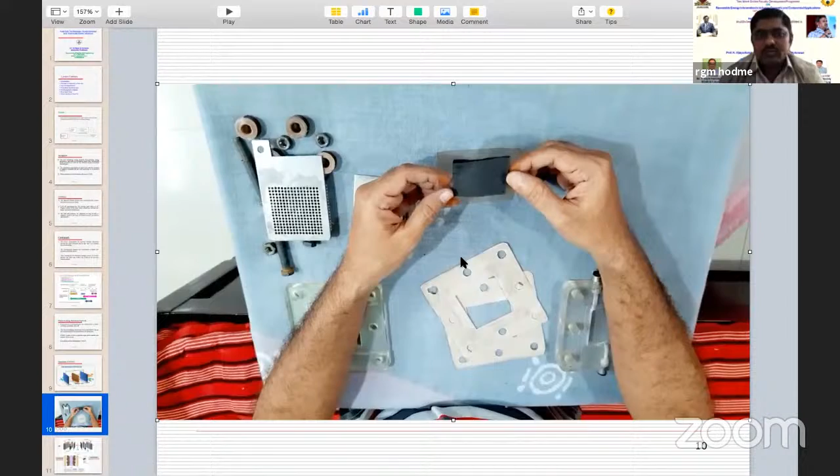In continuation of my explanation about the working principle of proton exchange membrane fuel cell. Is it coming, sir? Yeah, coming, sir. Okay. So

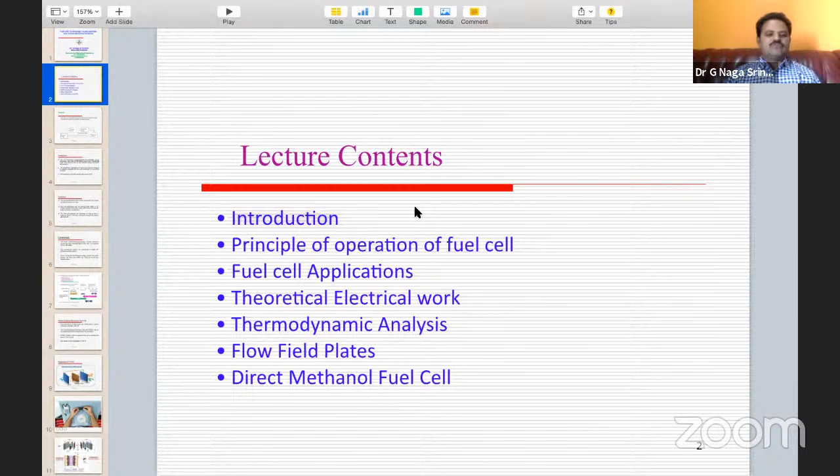Is it visible, all of you? Participants, can one of you please respond? Is my screen or slide visible to you? Participants, please unmute and say. Okay. Yes, sir. Okay.

Fuel cell is an electrochemical device which converts chemical energy of fuel and oxidant directly into electrical energy. In case of conventional system like IC engine, the chemical energy of fuel, means diesel or petrol, first burns in the combustion chamber, that is thermal energy released. That energy is utilized in expanding the piston, then we can get the mechanical energy. If you connect the generator to the diesel engine, then you can get the electrical energy.

But in case of fuel cells, the chemical energy of fuel is directly converted into electrical energy without any combustion and without the help of any mechanical linkages like piston cylinder arrangement. That is why this system attracted the scientists to explore it for practical usage. Means this system directly converts energy, bypassing the combustion as well as mechanical arrangements.

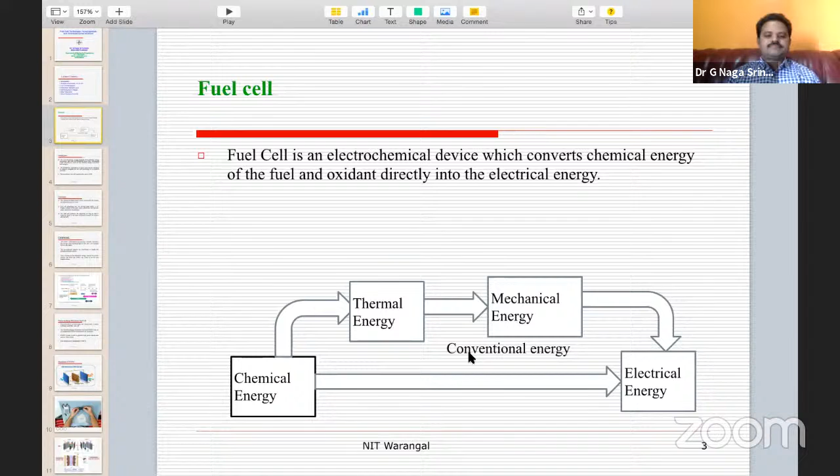Introduction. The ever increasing energy demand, non-polluting energy generation, and other environmental issues have encouraged many researchers to look for new efficient energy conversion technology. The widespread exploitation of fossil fuels and the advances in batteries relegated the fuel cell technology to a scientific curiosity.

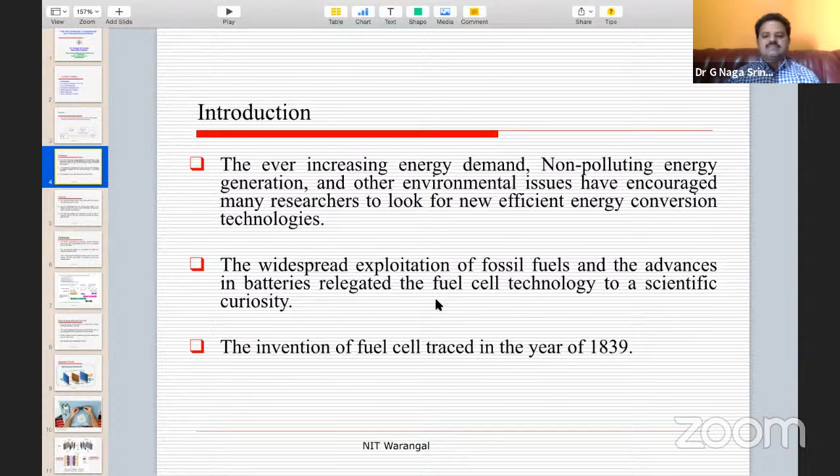What exactly does the point mean? The widespread exploitation of fossil fuels and advances in the battery technology relegated the fuel cell technology to scientific curiosity. So actually, the fuel cell was invented in the year 1839, but people have not focused much. But in recent days, due to these reasons, exploitation of fossil fuels and advances in the battery technology, again people have shown much interest in the fuel cell technology.

The scientist William Robert Grove discovered the reverse electrolysis process of water. Means water, we all know the chemical formula H2O. Means hydrogen and oxygen combined. If you want to split the water into hydrogen and oxygen, we need electrical energy. If you supply electrical energy into the water, water splits into hydrogen and oxygen. So whatever energy is required to split the water, if you combine hydrogen and oxygen, a proportionate amount of energy is released. Based on that concept, William Robert Grove discovered the reverse electrolysis process.

In this system, there are no moving parts, unlike an IC engine. Exhaust is only pure water, means when hydrogen gas and oxygen gas combine, before they combine into H2O, it releases electrical energy. That is why the exhaust from this system is pure water, which does not harm the planet. And also, no moving parts in the system means minimum maintenance.

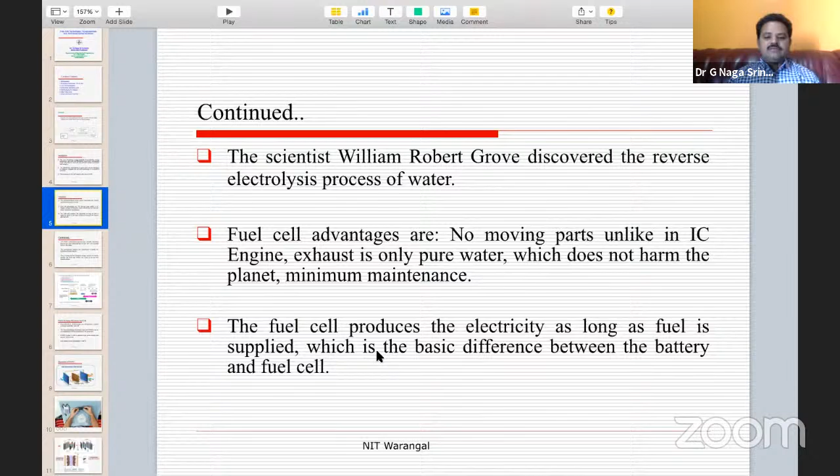There is a confusion between the words fuel cell and battery. A battery is not a continuous process; you can call it a discontinuity. First you have to charge the battery. The battery stores the energy. Then when you take power from the battery, it continues to discharge. So that is a somewhat intermittent process. But a fuel cell is not like that. As long as you supply fuel, it continues to generate electrical energy. So the fuel cell produces electricity as long as fuel is supplied, which is the basic difference between the battery and fuel cell.

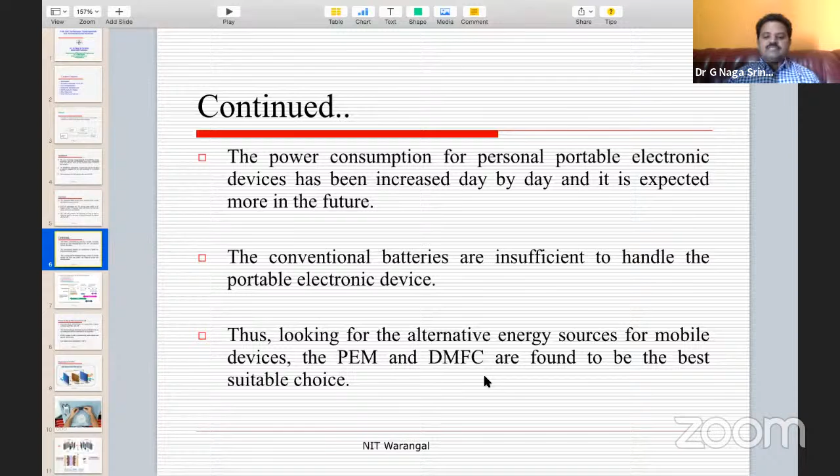So why are we going for this system? Power consumption of personal portable electronic devices like internet routers, cell phones, laptops has been increasing day by day, and it is expected to grow more in future. The conventional batteries are insufficient to handle portable electronic devices. Thus, looking for an alternate energy source for mobile devices, the proton exchange membrane and direct methanol fuel cells are found to be the best suitable choice.

A typical application is portable electronic devices. Let us say its capacity is 1 watt to 100 watts. For this power range, the direct methanol fuel cell will give a better solution. It is the suitable type of fuel cell when the application is in the range of 1 watt to 100 watts. And if the application is in the range of 1 watt to 10 kilowatts, the proton exchange membrane fuel cell is the best suitable system. So I am working on these two cells.

We have the facility in our institute. Almost four scholars already submitted; two got their PhD, then two more submitted. Six more students are working on direct methanol fuel cell as well as proton exchange membrane fuel cell. In our institute, we have this technology, and another faculty member in our department is working on alkaline fuel cells.

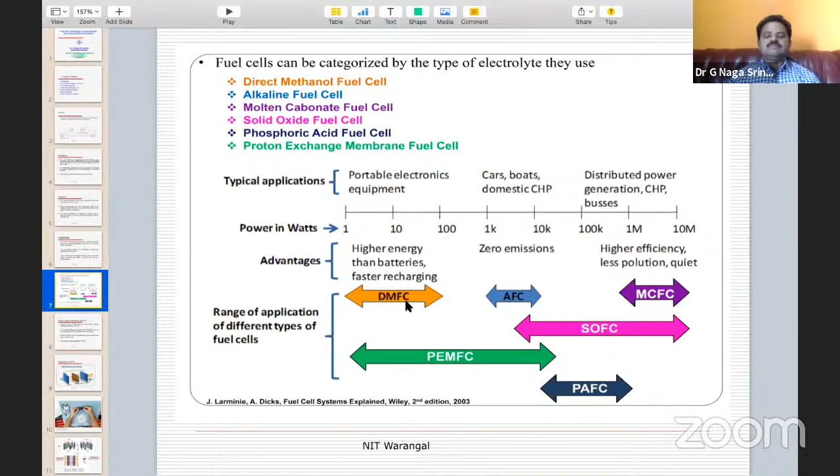Now we'll discuss the proton exchange membrane fuel cell first. What is the working principle? How does it operate? Then what are the applications?

Proton exchange membrane fuel cell has an ion conducting polymer membrane as an electrolyte. In case of batteries, H2SO4 is the electrolyte used. But in case of fuel cells, it is the proton conducting polymer membrane, a plastic paper, just like plastic paper, but its properties are different. What I mean to say is in batteries H2SO4 is in liquid form; here in fuel cells, the membrane is in solid form.

The proton exchange membrane fuel cell system is able to generate high power density and permits faster startup, and can operate at low temperatures, meaning even at ambient conditions it can work.

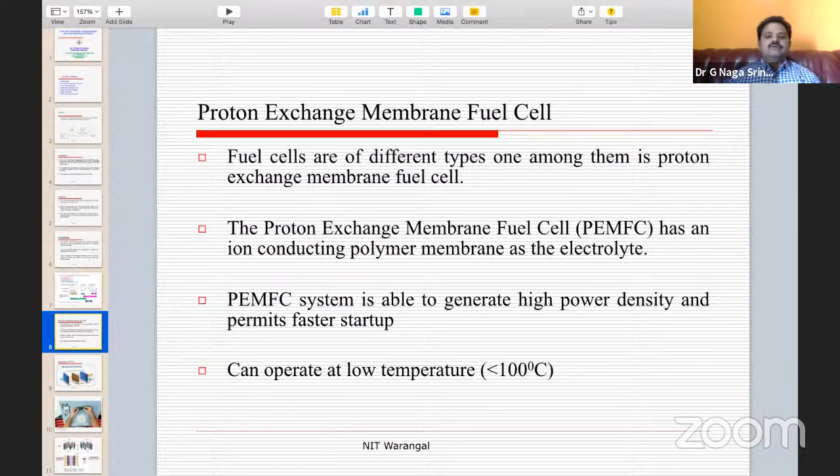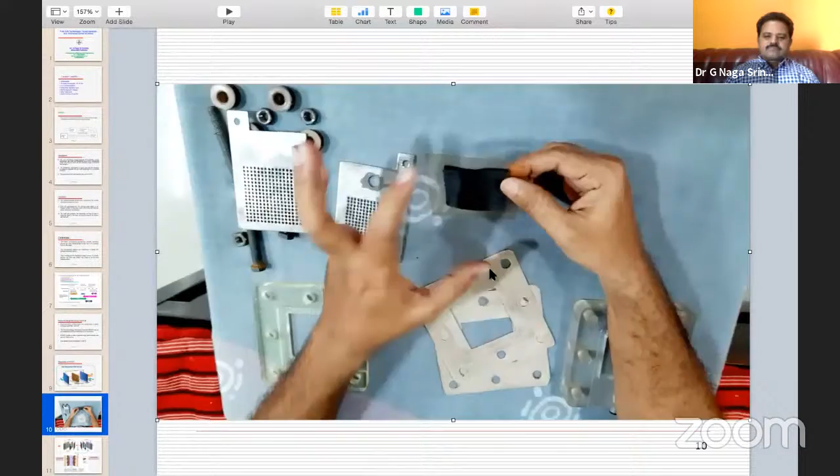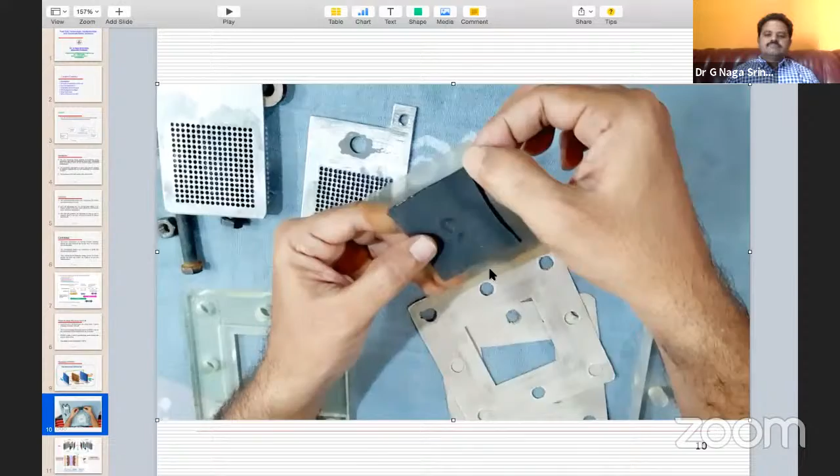In continuation of my explanation about the working principle of proton exchange membrane fuel cell, here I am going to explain the practically used fuel cell. This is called membrane electrode assembly. In this, the polymer paper is called membrane. It is mainly made up of Nafion material.

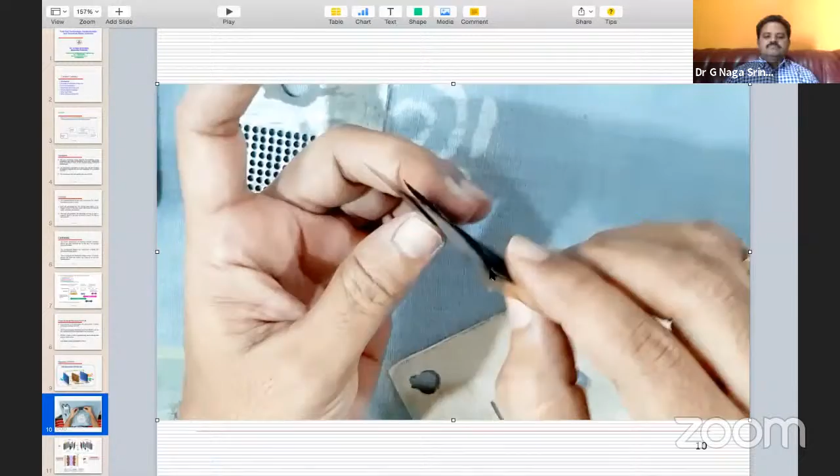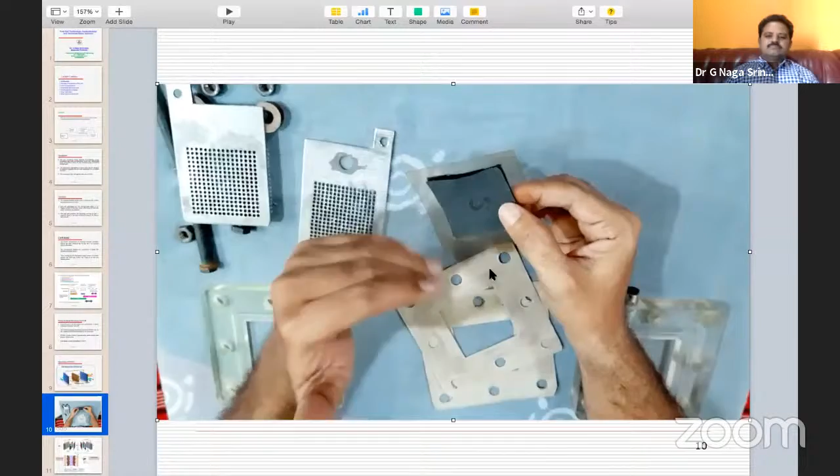On both sides of this membrane, the catalyst material is coated. Next to this catalyst layer, a gas diffusion layer is placed. Similarly, on this side also there is catalyst material and gas diffusion layer. The complete thing is called membrane electrode assembly. Now come to the operation of this fuel cell. On one side of this MEA, popularly called membrane electrode assembly.

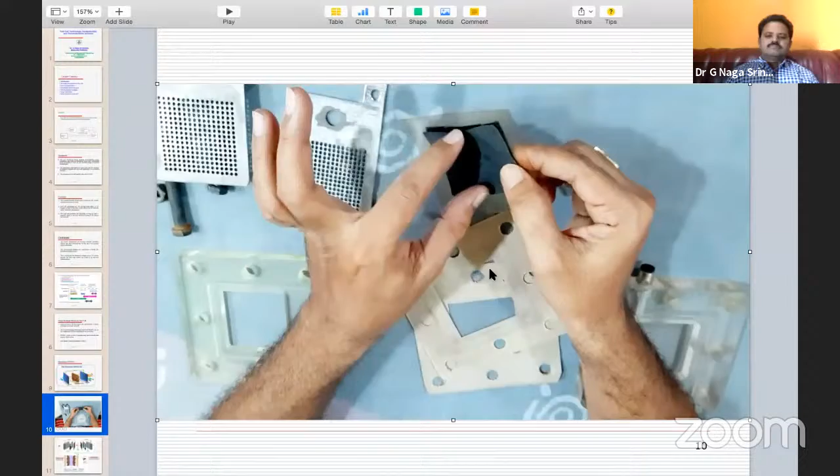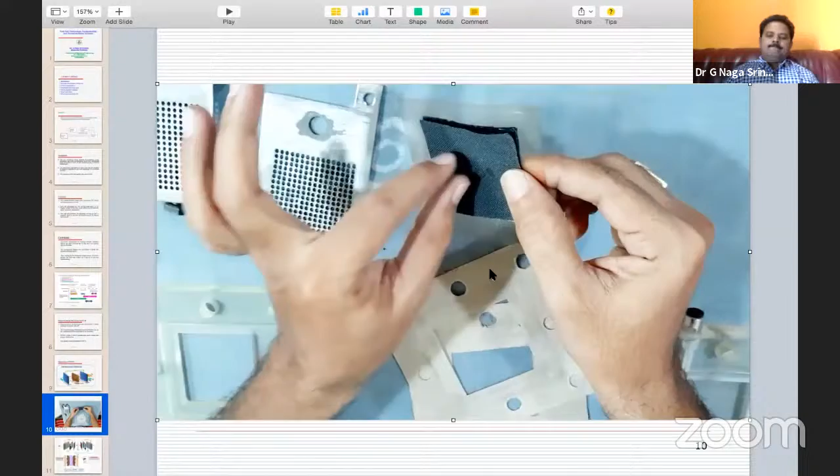When you supply the hydrogen gas, this gas is diffused through this diffusion material, mainly made up of carbon cloth. The catalyst material is made up of a platinum carbon mixture. When you supply hydrogen gas, it diffuses through this gas diffusion layer and reaches the catalyst material, where it splits into protons and electrons.

Then protons are conducting through this membrane, and protons means ions. H plus ions are coming this side. This membrane is offering resistance to the electrons, so electrons are available here. Now, on the other side of this fuel cell, the H plus ions reach here.

When you supply the oxygen gas, oxygen reacts with the H plus ions, and to complete that reaction, it needs electrons. So on this side electrons are available, and on this side electrons are required.

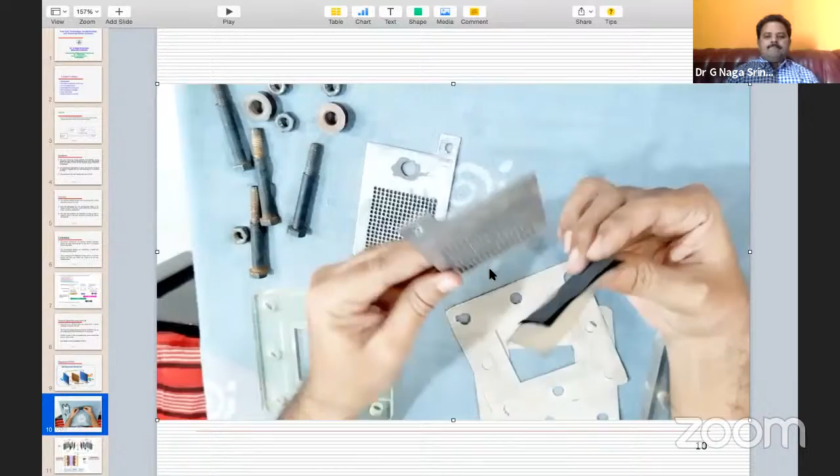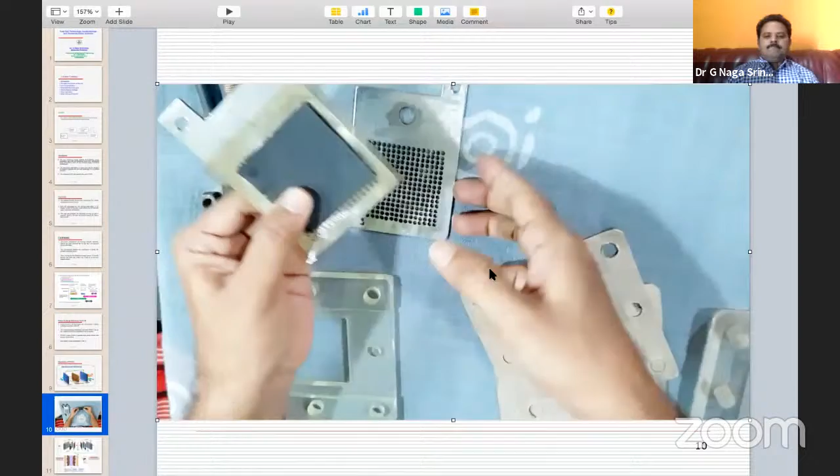So when you connect the electric field with the help of current collectors - this is called a current collector - I'm keeping one current collector on one side. Whatever electrons are generated conduct through this current collector, and to supply the other side, one more current collector is placed like this. Through the electric wire, when you connect these two, the electric field is connecting.

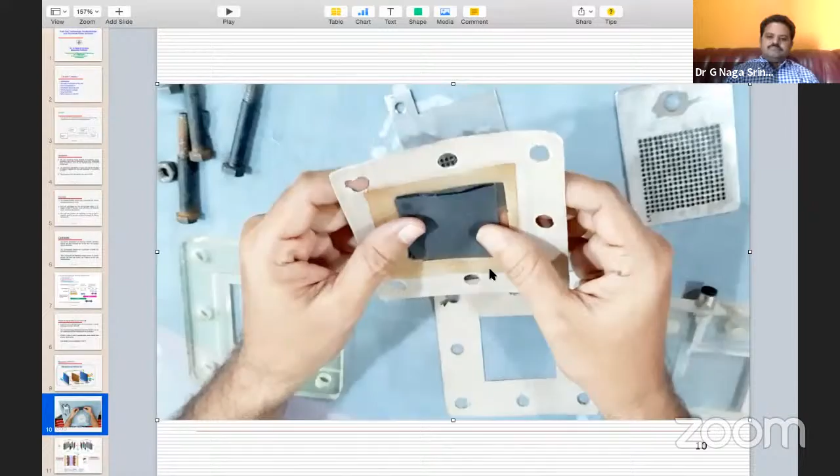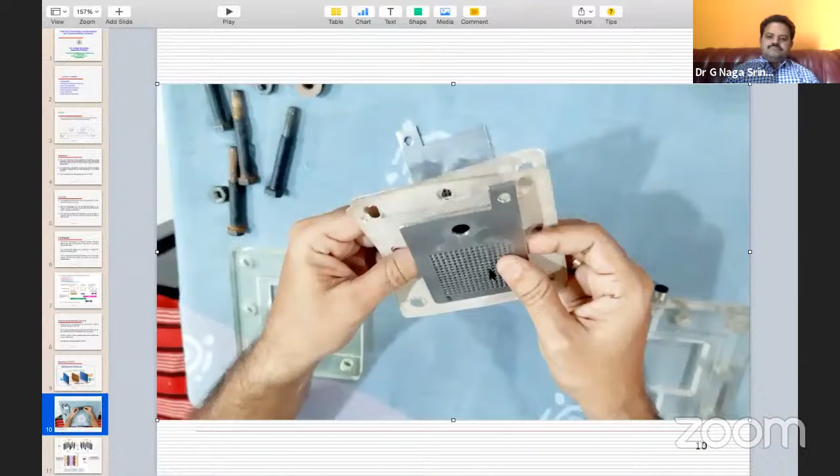Now, to avoid short circuiting of the current collectors, in between the plates a gasket layer is placed on both sides of this membrane electrode assembly. After placing the gasket layer, we keep the current collectors on both sides. Now we can avoid short circuiting of these current collectors.

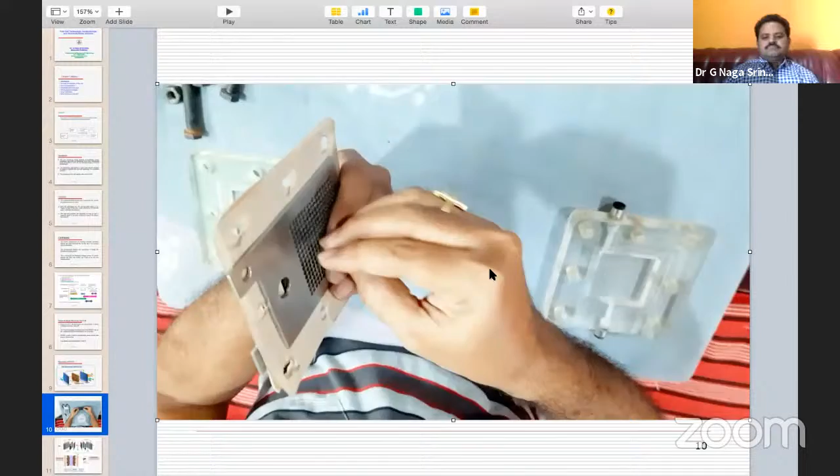Now with the help of an electric wire through some external load - let's say a bulb or motor - you connect these two through this external load. So the electric field is generated because here electrons are generating, then electrons are reacting here to produce the electric field. This is called a complete fuel cell.

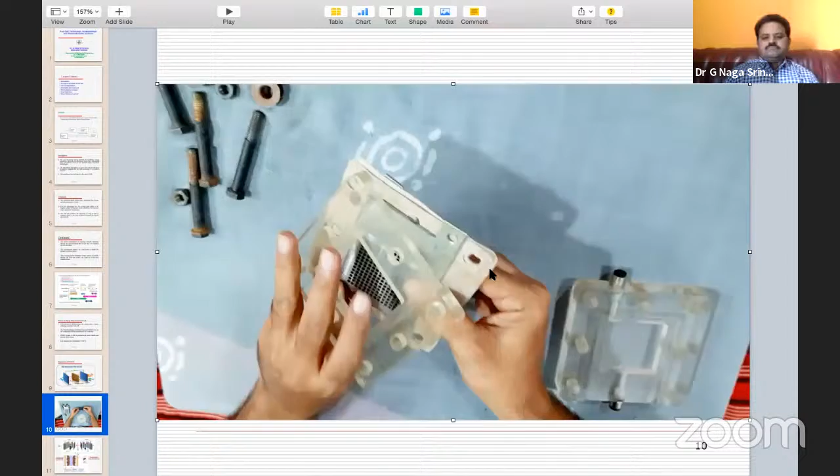So to assemble this, we need end plates to hold the complete assembly. This is one side end plate, this is another side end plate. These end plates are firmly held with the help of nut and bolt. Now this is called the complete fuel cell assembly.

I'll repeat the operation. When you supply the hydrogen gas here, as soon as you supply hydrogen, protons and electrons are generated at the catalyst area. Electrons are available for the electric field, and they are connected with the help of current collectors. The electric field - electrons are connecting this side, the anode side. This is called the anode side, and this is called the cathode side. So here you see, interestingly, the fuel cell operation.

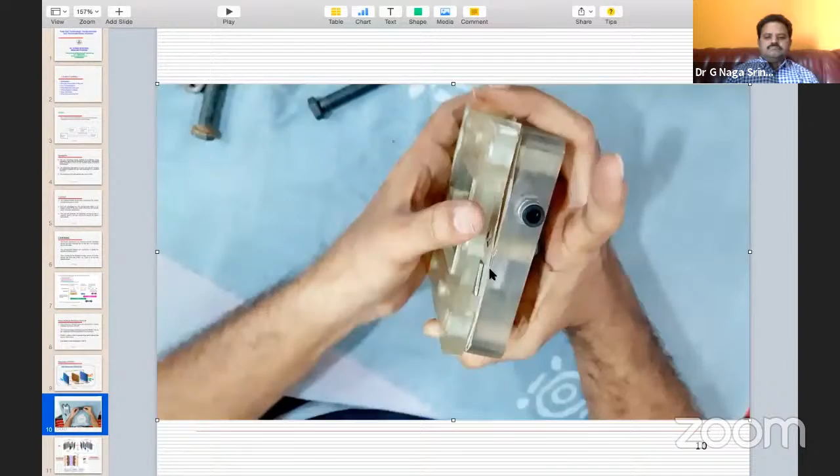Just by supplying the hydrogen gas and supplying the oxygen here, current is generating continuously. As long as you supply the fuel, it generates current.

The interesting point you have to observe in this fuel cell operation is it doesn't have moving parts, so less maintenance. Then long life, because wear and tear is not there. Then the emission from this cell is H2O.

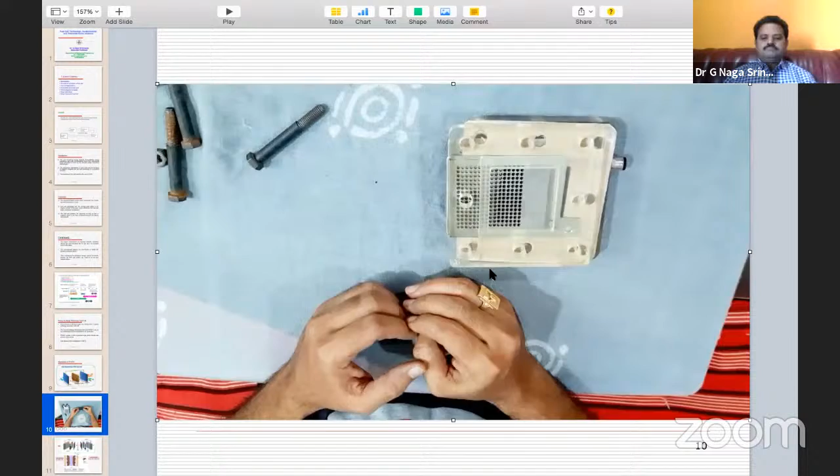This is environmentally friendly - water vapor or water. And it is similar to the IC engine.

As long as you supply the fuel, it continuously generates electric current. This is the upcoming technology that people are looking into.

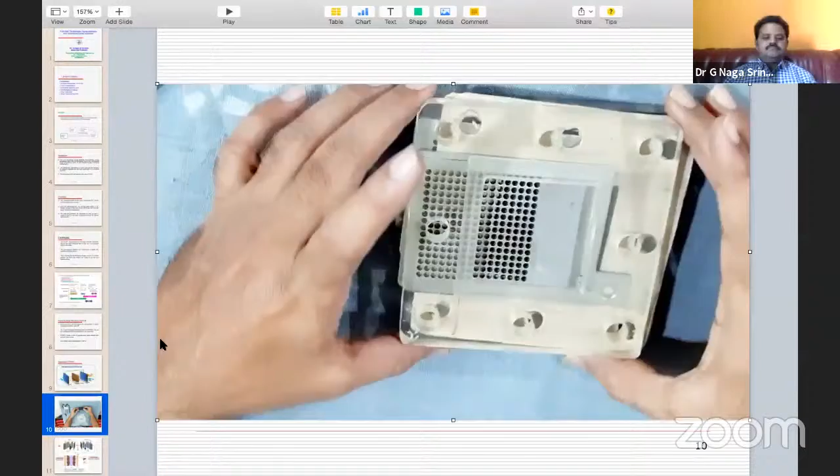So this is the operation of a fuel cell as practically used. Thank you.

Now, with that, I hope to some extent you understood the operation of the fuel cell. Now, more details about the fuel cell. In the previous system, previous slide, you have seen there are three components.

There is a catalyst layer applied on both sides of the membrane. This is PEM, meaning proton exchange membrane. Then followed by the gas diffusion layer - you might have seen this in the video - there is a carbon cloth.

In that, one problem is there. When you supply hydrogen gas, there is no guarantee that the gas may occupy throughout this space. If that space is not occupied by the gas, what happens? The chemical area available may not be utilized properly.

That is why, to overcome this problem, there is a flow field plate - FP means flow field plate. This flow field plate has internally cut side grooves on the inner side. Now, when you supply hydrogen gas, that gas flows following the groove - it passes through this groove of the plate throughout this space and comes out on this side - so that the gas may be available throughout this volume or space.

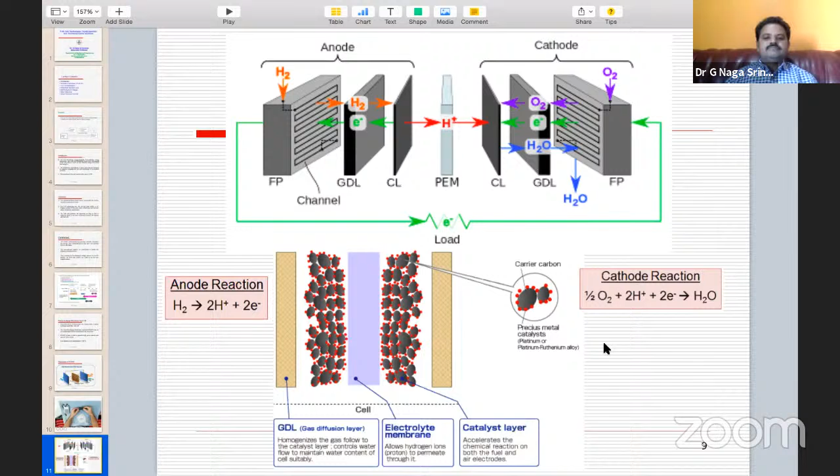So now I hope you understood the operation of the fuel cell. Any doubt on this topic? If you need any clarification, I can clarify. Otherwise, I'll go ahead.

With that, now let's see the application of fuel cell. Fuel cell can be used in cars in place of an IC engine. In the previous slide, I showed single cell operation. A single cell may hardly generate 0.5 to 0.8 volts.

So the Toyota company prepared the fuel cell stack, and this may generate power equivalent to the engine used in these vehicles. That power, whatever power the engine develops, let us say 30 horsepower, 40 horsepower engine, like that—it is similar to that.

The fuel cell stack is designed such that number of cells are connected in series, and that system is called a fuel cell stack. That stack can be placed by removing the engine from the vehicle, and this stack generates current almost equal to that engine, and the traction motor or electric motor may be used here before the gearbox.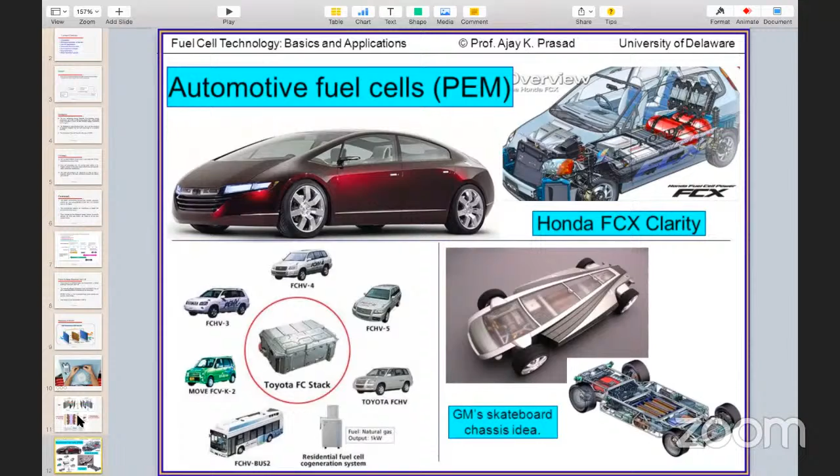Now coming to the analysis point, why the fuel cell has not become popular so far: one is storage and handling capacity of hydrogen. Another thing with respect to the system, two key issues limiting the widespread commercialization of fuel cell are lower performance and high cost.

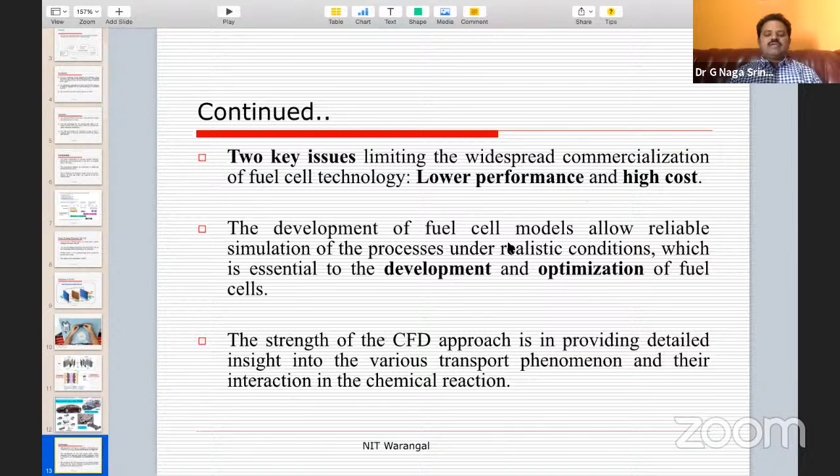So the performance can be increased once you understand the thermodynamics of the fuel cell. Now first I will discuss the theoretical electrical work, then the thermodynamic analysis point I will discuss.

Theoretical electrical work: how to determine how much electricity the fuel cell can generate. Because there is no combustion in the fuel cell, the relevance of hydrogen's higher and lower heating value is used as a measure of energy input in a fuel cell. This is the maximum amount of energy that may be extracted from the hydrogen.

However, while electricity is generated in the fuel cell, in every chemical reaction, the amount of entropy is produced. Because of that, hydrogen cannot be fully converted into useful work.

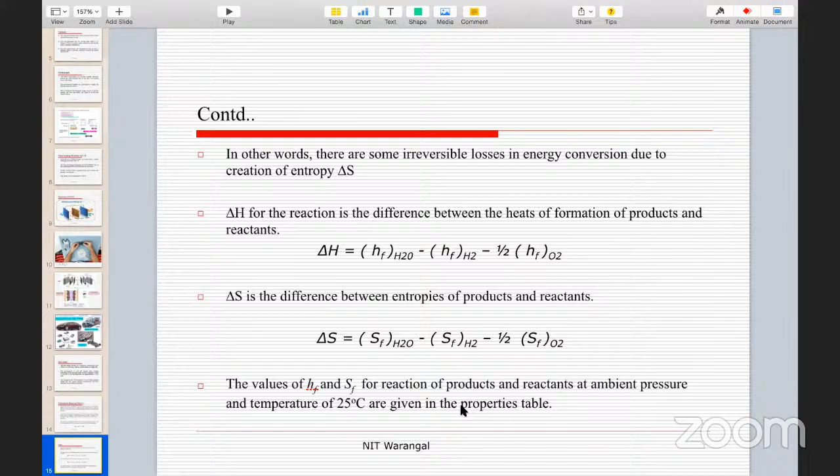So in general, electrical work is the product of charge and potential: Electrical work is equal to charge into potential. Q is the charge in coulombs per mole, E is the potential in volts. This is the total charge transferred in a fuel cell reaction per mole of H2 consumed.

For 1 mole of H2 consumed, how much charge is transferred is given as N into Avogadro's number, where N is the number of electrons per molecule of hydrogen gas, and this is the number of molecules present in a mole, multiplied by the charge of 1 electron. So this equation gives the charge transferred.

So how many electrons are present in a molecule of hydrogen? How many molecules are present in 1 mole? Because we are calculating per mole of H2. Then the charge of 1 electron. So the product of the number of molecules per mole, that is Avogadro's number, and the charge of 1 electron, we can call this the Faraday's constant.

Product of Avogadro's number and charge of 1 electron is known as Faraday's constant, and its value is given as 96,485 coulombs per mole. So therefore, electrical work is related as N into F into E.

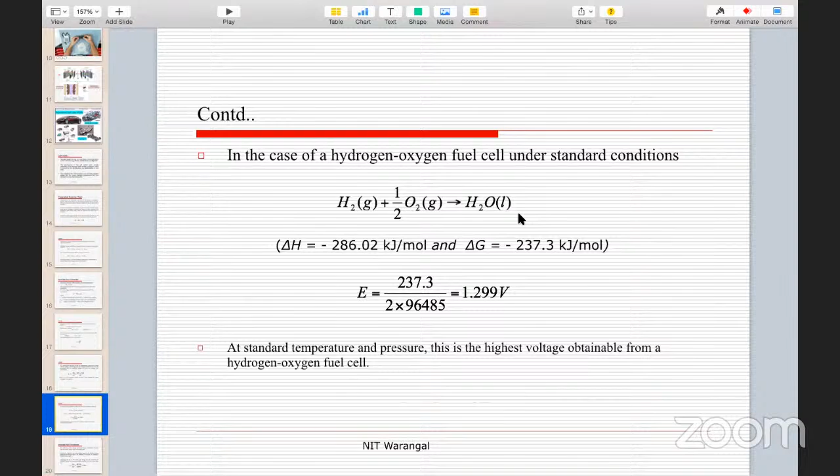Cell voltage is one performance parameter in the fuel cell. Another one is cell efficiency. The efficiency of any energy conversion device is defined as the ratio between useful energy output and energy input. In case of fuel cells, the useful energy output is the electrical energy produced, and energy input is the enthalpy of hydrogen, because the fuel you are supplying is hydrogen. So the hydrogen higher heating value is the energy input, and whatever electrical output you get from the cell is the cell output.

Therefore, the maximum possible efficiency of the fuel cell is given as delta G by delta H. So 237.34 by 286.02, you will get 83%. So the maximum cell efficiency that can be attained in the fuel cell is 83%.

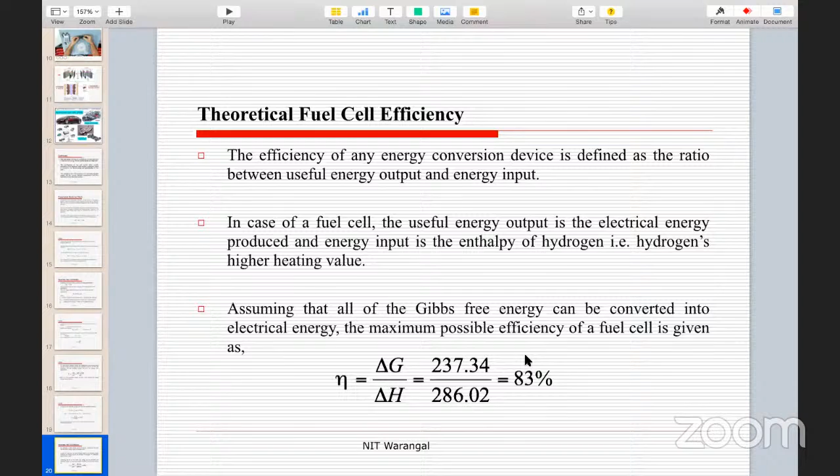Now, why are you going for thermodynamic analysis? I already mentioned thermodynamic analysis studies the losses incurred in the operation of the fuel cell when you draw current from the cell. In the application of fuel cells, to generate electricity from hydrogen, the performance of the cell must be high. However, some problems such as decrease in performance stemming from thermodynamic irreversibilities in the fuel cell arise during operation.

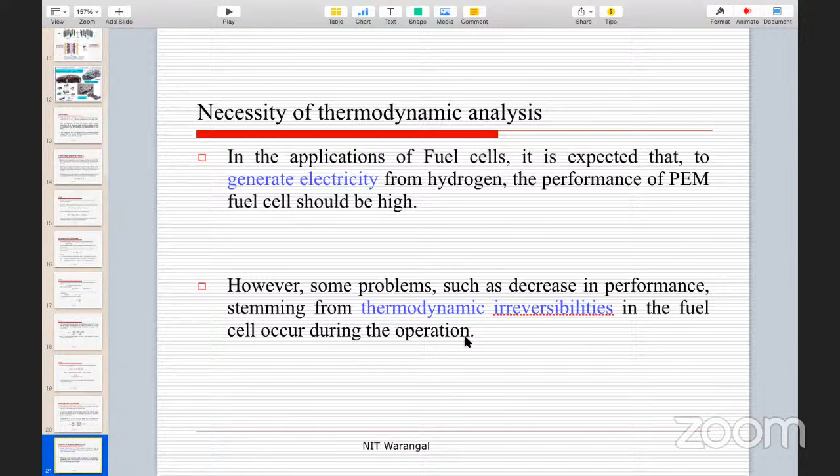The thermodynamic analysis, in other words, you can call it an electrochemical model. Here, those points I'm going to discuss. Useful work is obtained from the fuel cell only when current is drawn. When you draw current, it starts its operation in the form of chemical reaction.

The actual cell voltage, the reversible cell voltage, decreases from its equilibrium thermodynamic potential because of irreversible losses. When you look into the chemical reaction of the fuel cell, H2 plus O2, you get electricity plus H2O plus heat. The actual cell voltage is given as reversible cell voltage minus losses.

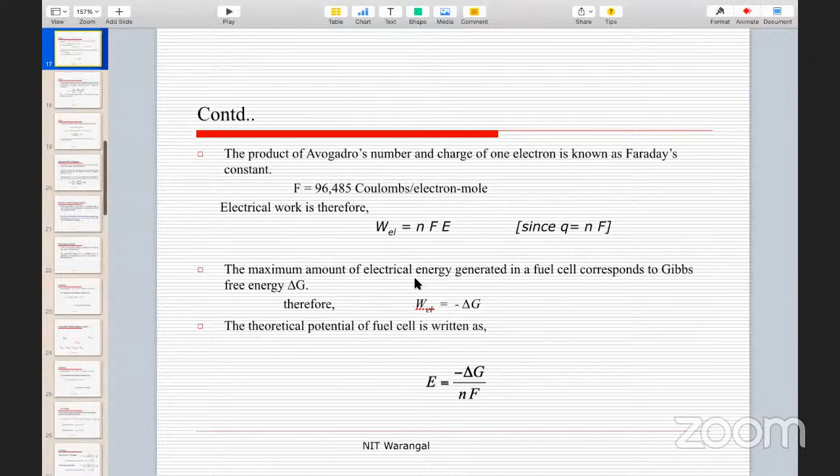So up to this portion, the reactions may happen. After that, it stops. So to continue the operation of the fuel cell, we must connect anode and cathode with the help of a current conductor. So when you draw current from this cell, theoretically the cell is generating 1.299 volts,

but when you draw current with the help of external circuits, other resistances are involved. Whatever electric wire you are using offers some resistance to the electron flow, and whatever membrane you are using offers some resistance to the conduction of protons. This is one loss. And also at the chemical reaction, as soon as you supply gas, there is no guarantee that it immediately participates in the reaction. It may take some time to react.

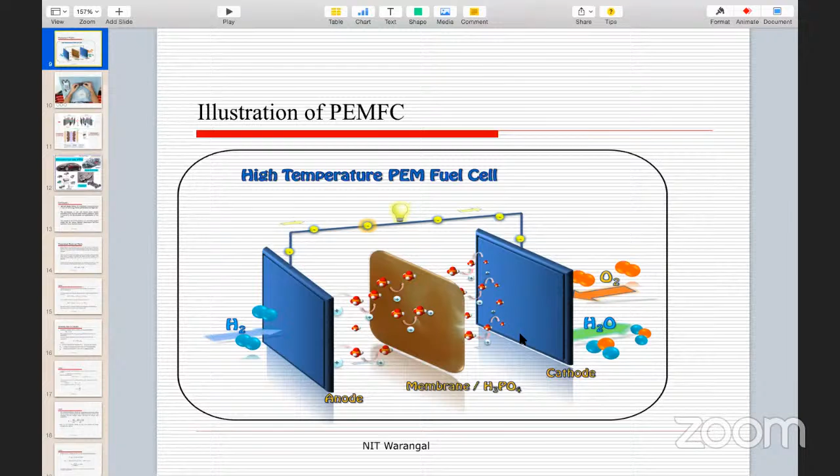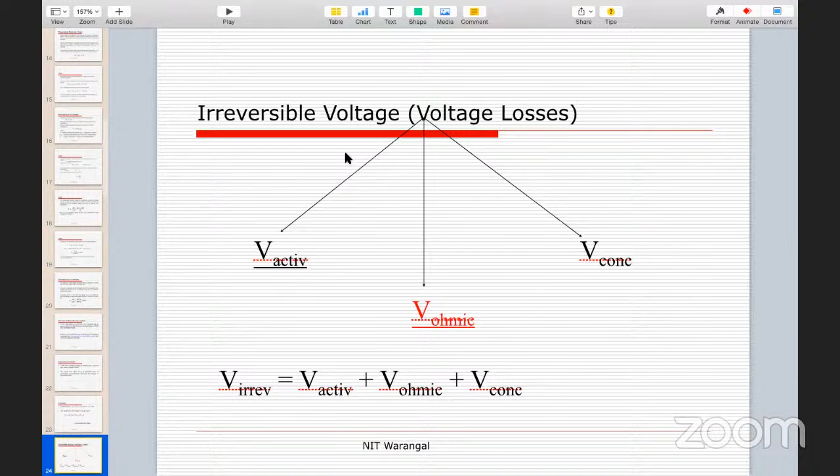So the topic which deals with the study of voltage losses is called thermodynamic analysis. See, these are the losses: activation loss, ohmic loss, and concentration loss. Sum of these losses you can call irreversible voltage. So in the operation of a fuel cell, these losses must be considered.

Otherwise, in the ideal case, if these are zero, the reversible voltage is equal to the cell voltage. But practically, we cannot avoid these losses. That is why we have to take into account these losses in the operation of the fuel cell. Therefore, cell voltage is equal to reversible cell voltage minus losses.

So now we'll discuss the mathematical model to see the effect of the temperature and pressure of the supplied gas on the performance of fuel cells. So we have a set of equations. Please follow, all of you. This is very interesting, and you can start analyzing the cell performance mathematically, or you can give this topic to your UG students for their final year project. A very interesting study we can get here.

So one by one I am explaining. I'll go back once again. See here, the total number of parameters. Cell voltage is equal to reversible cell voltage minus activation loss, ohmic loss, and concentration loss. From the literature, we have a set of equations available to determine the reversible cell voltage, and similarly the activation overpotential, ohmic loss, and concentration loss.

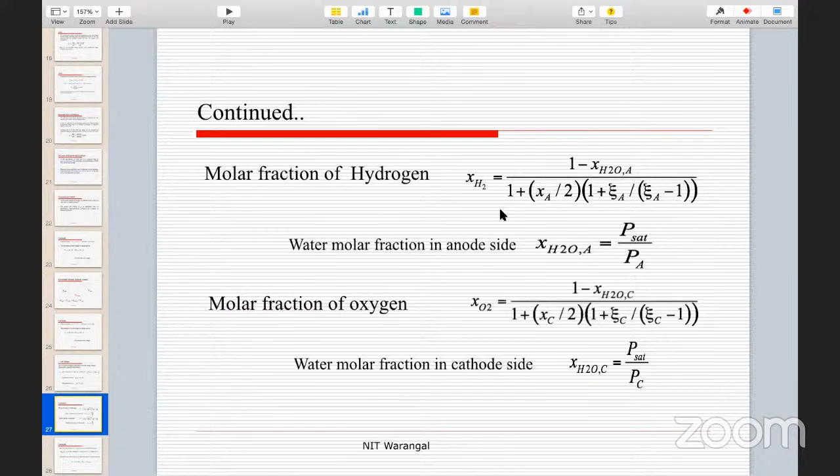Okay, so far whatever the equations I explained, they are useful to determine the reversible cell voltage. Now, actual cell voltage is reversible cell voltage minus the losses. So how to quantify these losses? So we have set of equations available in the literature. Now first I will discuss the activation loss. Activation losses are caused by slowness of reactions taking place on the surface of electrodes.

I already mentioned at the catalyst area, as soon as the hydrogen gas reaches, it starts splitting into protons and electrons. How fast that hydrogen gas is splitting into protons and electrons is studied by this activation process. And if it takes more time, activation losses are more. If it takes less time, activation losses are less. So to overcome that loss, portion of voltage generated is consumed in overcoming the chemical reaction that transfers the electrons to or from the electrode.

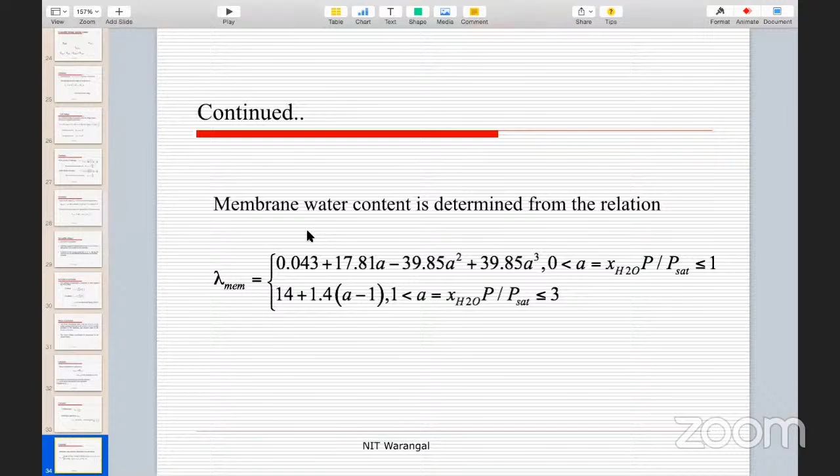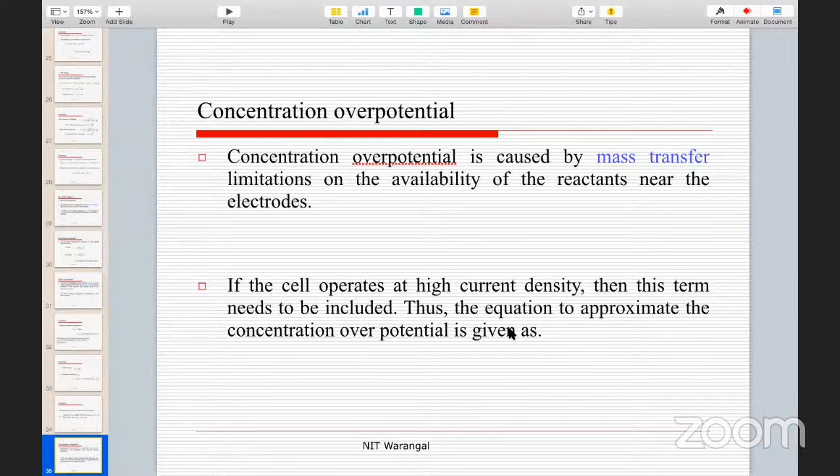Then other loss in the fuel cell is concentration loss, or other way you can call it concentration overpotential. This is mass transfer limitation. I already mentioned, if the cell operates at very high current density, this term needs to be included because water may be getting accumulated at the cathode side, and that may obstruct the catalyst area, due to which oxygen may not reach that area and may not react.

So for that, the empirical relation is given as I into beta 1, I by I maximum whole to the power of beta 2, where beta 1, beta 2, and I maximum are constants that depend on temperature and reactant partial pressures and can be determined empirically. Beta 1 can be related further using these relations. If this value is less than 2 atmosphere, you can use this relation for beta 1. Else, you can use this equation.

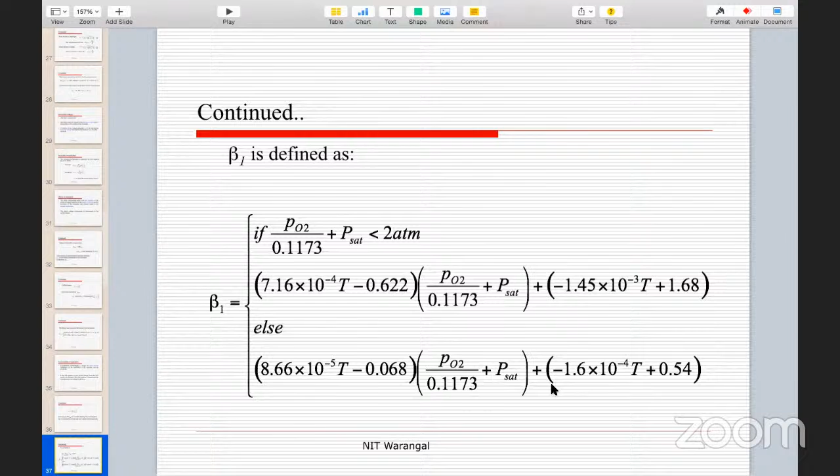So once you have the ohmic, concentration and activation relations, we have the mathematical relation for activation loss, ohmic loss, and concentration loss. You substitute this in this equation, then you will get cell voltage. Cell voltage depends on the current you are drawing. At low current density, cell voltage may be maximum. When you draw more current, faster reactions take place, and the losses also proportionately increase. That is why as more current is drawn, cell voltage decreases.

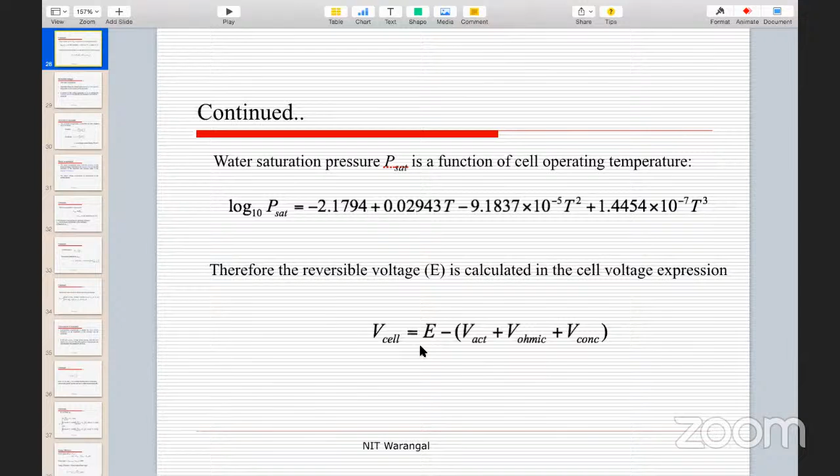So once you have cell voltage and current, the product of cell voltage and current will give power. The power output of the cell is equal to V cell into I, where V cell is E minus V activation, V ohmic, V concentration, into I. And this is the power output. Power input is what you are giving to the cell, the hydrogen gas you are supplying: hydrogen higher heating value times number of moles of hydrogen in minus number of moles of hydrogen out, because some hydrogen may come out without participating in the reaction.

So here, please observe the change. The number of moles of hydrogen reacted, this is unreacted gas, then hydrogen higher heating value. This is the power input. Therefore, fuel cell efficiency is equal to power output by power input. You'll get it.

See, any doubt on this? Yes? All of you, are you following what I'm explaining? Seems to be new area.

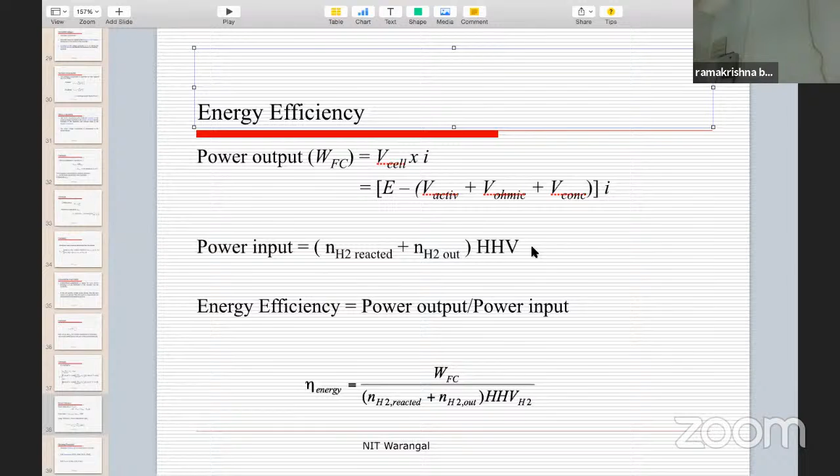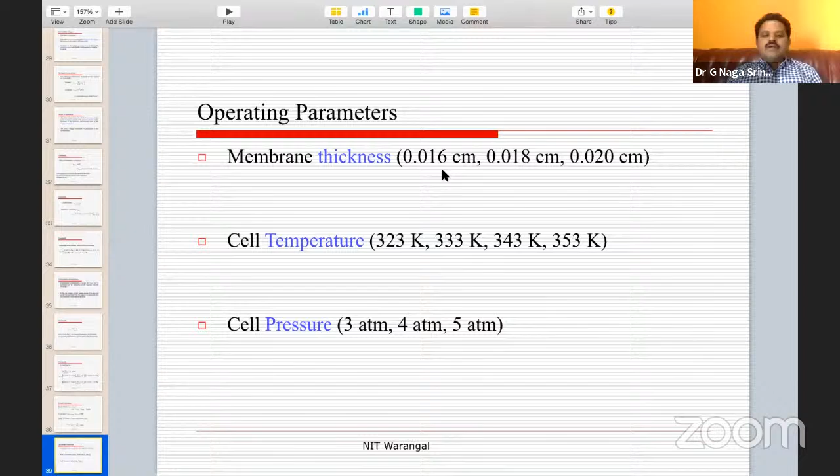So here, whatever the mathematical expressions I explained, I have written a program, and these are the parameters I kept. Cell temperature is varied from 323 Kelvin to 353, pressure is varied from 3 atmospheres to 5 atmospheres, and membrane thickness I varied from 0.016 centimeter; these are the standard membranes available in the market. So these are the graphs I got by writing the program.

So from this graph, please observe: these lines represent efficiency. These lines represent irreversible voltage, meaning losses. Please observe, don't think that this is voltage. It is irreversible voltage, meaning irreversible loss. So as temperature is increased from 323 to 353, you see here, this is 323, this is 353, the loss is getting decreased.

When loss is getting decreased, efficiency may increase. You see this blue color line has come to the top here. Here it is at the bottom, meaning the blue color line represents 353 Kelvin. Loss is getting decreased as temperature is increased. Proportionately, efficiency of the cell is increased. So this is one observation you can make with the help of those mathematical equations.

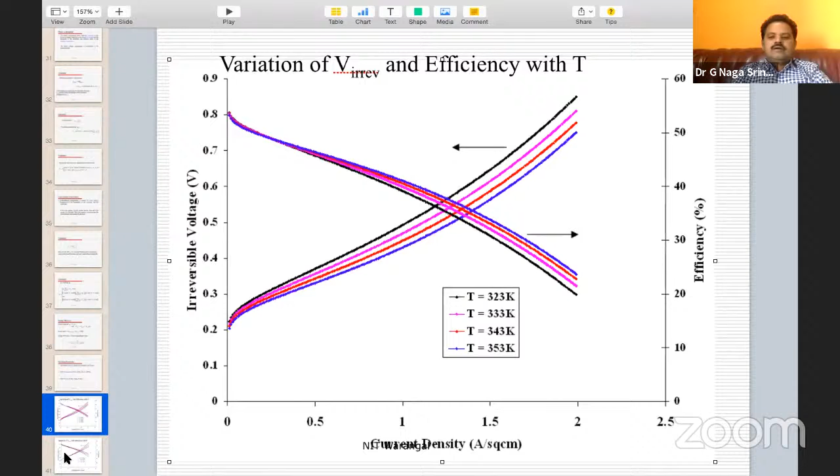Then why can't you go for high pressures? Here the energy required to store the gas is more, and sometimes whatever energy we are obtaining from the cell may not be equal to that. To compensate for the energy required to compress the gas, whatever gas you are using to generate electrical energy, there must be a gain. So at high pressures, compression of hydrogen is also not economical and not safe. That is why we stopped going beyond 5 atmospheres.

Similarly, the membrane thickness effect on performance of the cell: you see, the thickness of the membrane is increased. Here, the blue line is representing thin, then medium and thick. So as thickness is increased, loss also increases. A thin membrane may offer less resistance. That is why the thin membrane is giving maximum efficiency. So this is the thermodynamic analysis of the fuel cell.

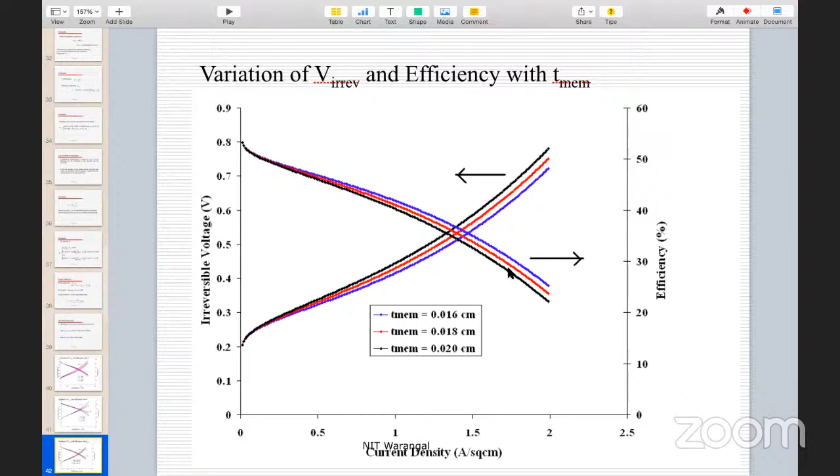Now, I already mentioned in our department we developed a research facility. There, mainly we are working on flow field plate designs. In the fuel cell, this is the exploded view. This is the membrane and catalyst material. When you supply gas, that gas may accumulate at one place and not distribute throughout the space. Instead, if you use a flow field, it gives a path to the gas flow, and the gas passes through this path, so it occupies the complete space available for the catalyst area.

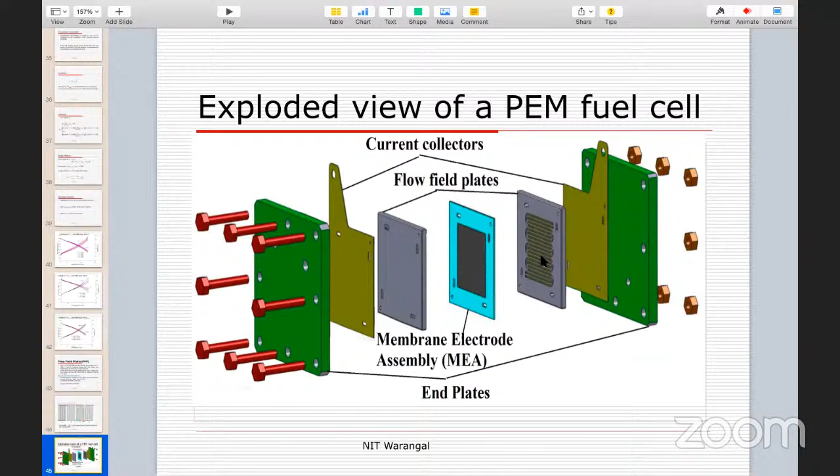So this flow field plate design influences the performance of the fuel cell very much. So we have designed different types of flow fields. This is one shape of the flow field, called the serpentine shape. Gas may enter here and flow through this groove like this. By the time it comes out, it occupies the complete space. Next to this, catalyst material is there that reacts with the gas, splitting it into electrons and protons.

Electrons may conduct through this plate itself. This plate is a bipolar plate, made up of graphite. It is acting as a flow field plate cum current collector also. It conducts electrons in a better way, and it is also non-reactive with hydrogen gas, oxygen gas, humidified gas, so it is non-corrosive. That is why graphite material is used. But one disadvantage is it is a very brittle material.

Another shape of the flow field is the lung channel. Our human lungs are there, na? From here, gas may enter, distribute to both sides, and come out here. People observed that oxygen distribution is perfect in our lungs. That is why we also attempted the lung channel design for supply of oxygen and hydrogen. And this is the leaf channel, because in the leaf, with photosynthesis in plants, there is also better distribution.

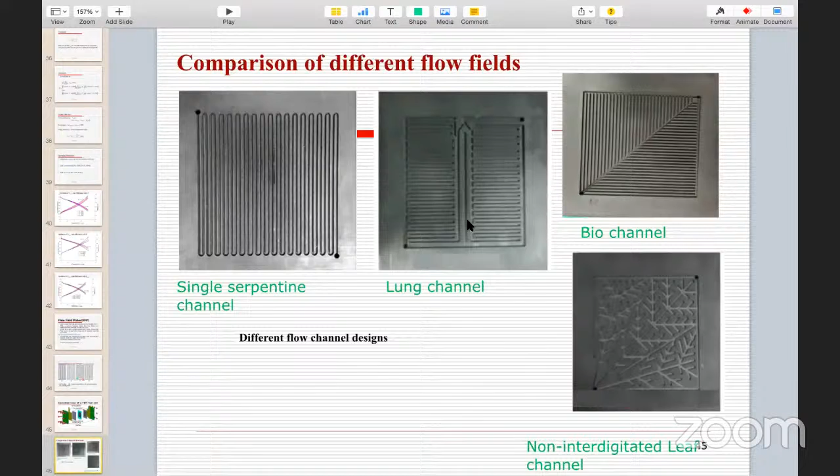In the simulation study, we can arrive at the best design. Based on that, with the help of that best design configuration, we can give it to the manufacturer. He can manufacture the plates like this.

So these are not photographs. These are plates, original plates we are using in our lab.

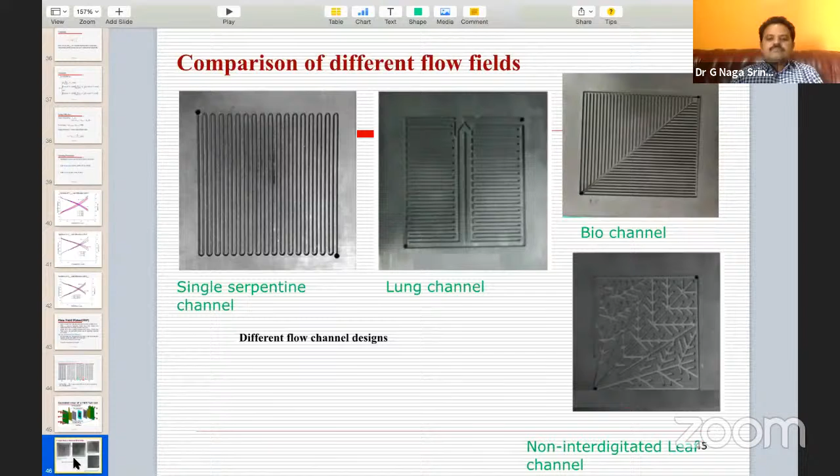Because, as you might have seen in the previous slides, at different pressures, different temperatures, gas is supplied at different mass flow rates, and different humidified gases. So those parameters can be varied with the help of this test station. That facility is there in this test station.

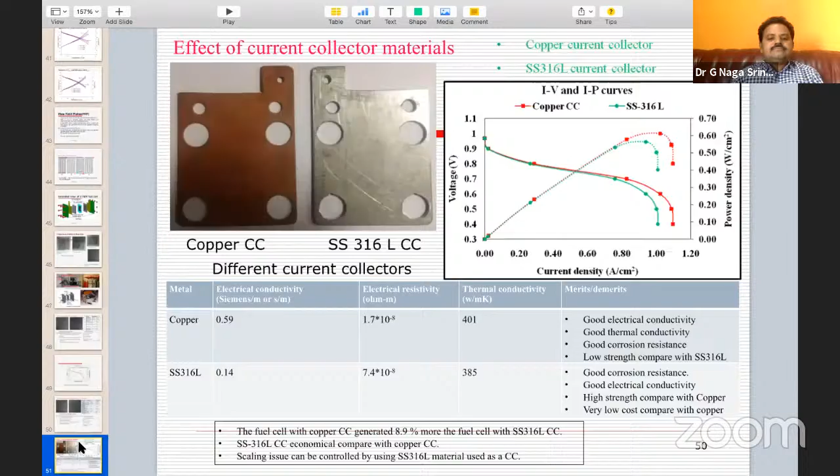I'll show that, direct methanol fuel cell. In the previous cell, that is proton exchange membrane fuel cell, we have to use hydrogen as the supplied gas and oxygen as the reactant. But hydrogen has one issue, that is safety issue. To overcome that, direct methanol fuel cell we attempted.

Direct methanol means in liquid form, and that too diluted liquid. The same membrane can be used, meaning the catalyst material is the same. Instead of supplying hydrogen gas, we can supply methanol, direct methanol in liquid form. So direct methanol fuel cell is better suited for power hungry portable devices than PEM, which is supplied by hydrogen and oxygen. This is primarily due to ease of handling - liquid fuel is easy to handle - and high theoretical energy density, meaning the space occupied by liquid methanol is less than gaseous fuel.

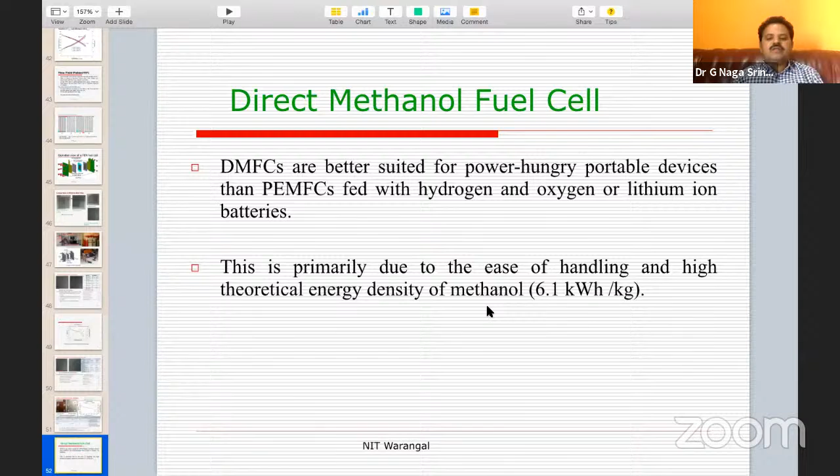The reactions taking place on the anode side give CO2 plus 6 electrons and 6 H plus ions. On the other side, you supply oxygen gas, then 3/2 O2 plus 6 electrons and 6 H plus ions gives 3H2O. So for each mole of CH3OH, for each reaction, 6 electrons participate.

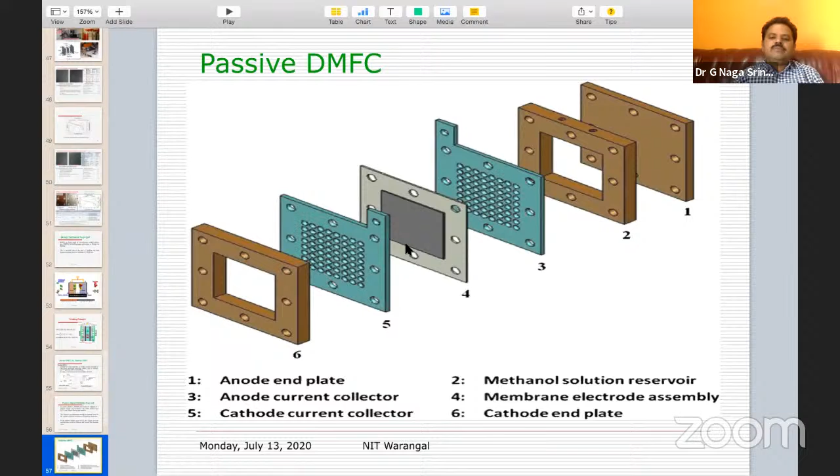I already mentioned we are targeting to design the cell which supports charging of laptops and cell phones at present. We can even advance the system further, even the battery in the cell phone can be replaced with the help of this direct methanol fuel cell.

Let's say the cell generates 2 volts. If you connect a boost converter, which are available with USB ports, it enhances the cell voltage 3 to 4 times, and with the help of the USB converter you can connect it to charge the cell phone.

This is just supplementary. Already in the cell phone a battery is there, but our target is even to remove that battery and keep this direct methanol fuel cell inside the cell phone itself, so there's no need to recharge every time. Just by refilling the methanol solution, it can continuously work, even in remote places with no need to depend on conventional current.

Current generates here itself, and its duration is long. Consumption rate is very less, and cost is also very, very less. The charging and discharging problem may not be there, and the life is more.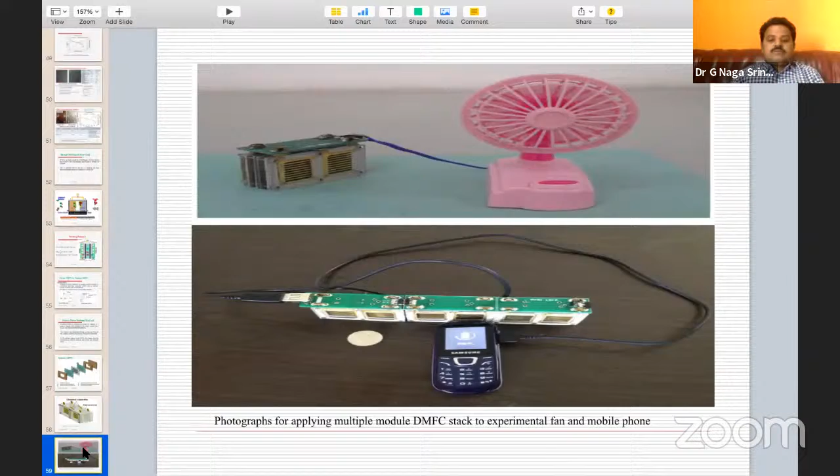So with this, I'm concluding the presentation.

In this thermodynamic analysis, to decrease the losses, PEM fuel cells should be operated at higher cell temperature for a given operating pressure and membrane thickness. When the proton exchange membrane fuel cell is operated at constant temperature, and by keeping temperature and membrane thickness constant, higher operating pressures can be selected to decrease the thermodynamic irreversibilities.

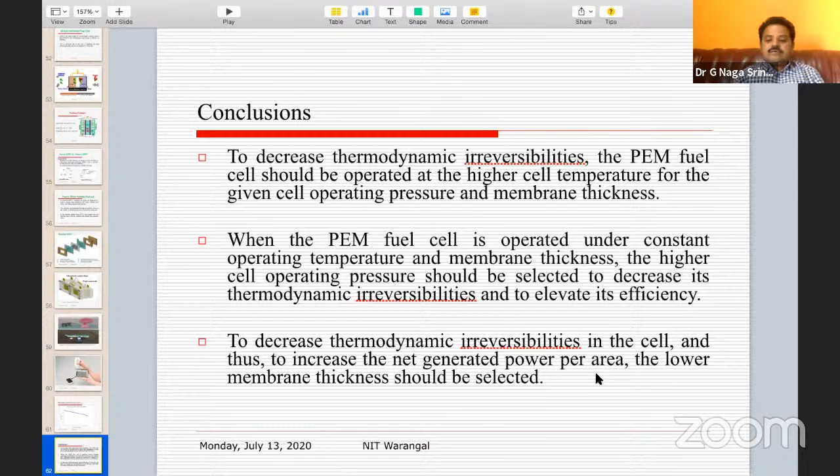And with regard to the membrane thickness, a lower membrane thickness must be used.

In case of direct methanol fuel cell, 2 molarity means in 100 ml, 4 ml is methanol and 96 ml is water. That is 2 molarity, as per a rough estimation I'm telling here. 2 molarity methanol concentration gives better performance at lower current densities compared to 4 molarity concentration.

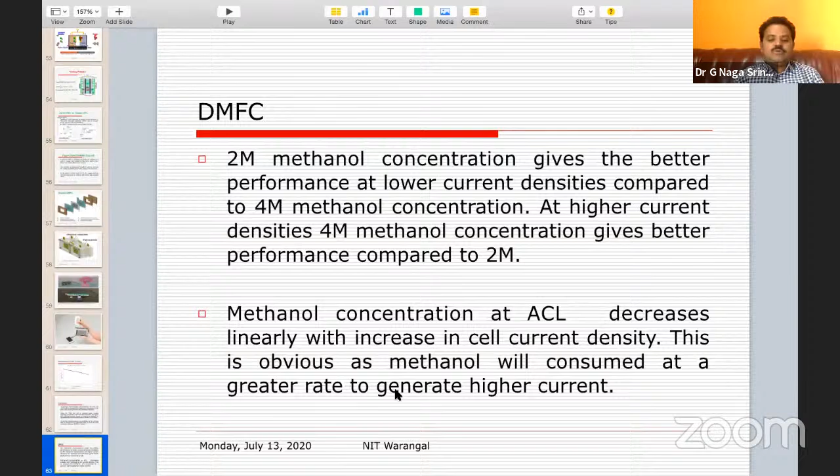What I mean to say here is, if the requirement or demand is at low current density, then don't go for high concentration methanol; low concentration methanol is enough. Similarly, methanol concentration at the anode catalyst layer decreases linearly with increase in current density. This is obvious as methanol will be consumed at a greater rate to generate high current.